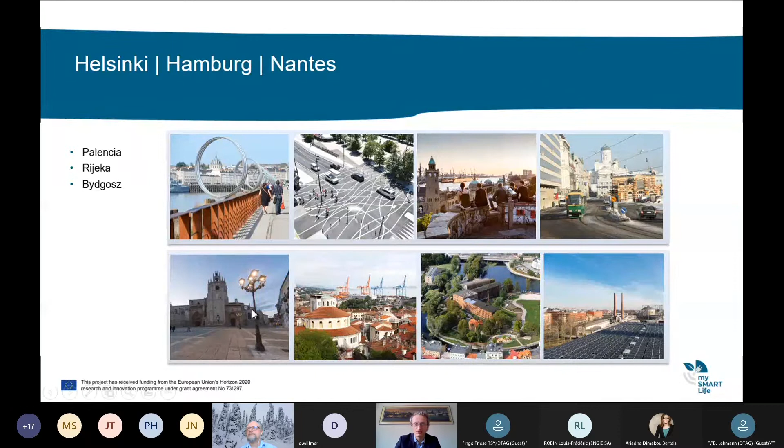We will collect them and ask them aloud to our speakers at the end of this web seminar. Having introduced you to the project and its objectives, the next presentation will be given by Hannu Pikarainen, who will present the heat demand response service. Hannu, the floor is yours. Thank you, Matthieu.

All right, let's start with a brief background on HELEN. HELEN is about a 1,000 people company, and we make net sales of around 900 million euros annually. For this topic, the 1,300 kilometer district heating network is the basic resource.

In addition to district heating, we also offer district cooling, electricity and services for various types of micro generation of energy, like solar panels and so on. We are also involved in electric traffic, like EV cars and so on. Our target is to be carbon neutral by 2035. Next slide, please.

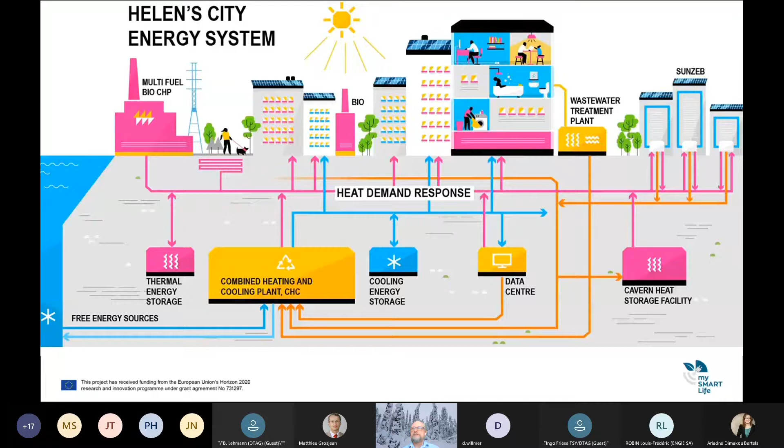So what do we mean by heat demand response in this case? For instance, in apartment buildings, when people take a shower in the morning, there is a certain peak in heat demand. If we could move that peak and flatten the consumption of heat in the network, we could end up with lower energy costs because we can optimize the use of fuels. This also means we could end up with lower emissions. That's the basic idea with heat demand response in this case.

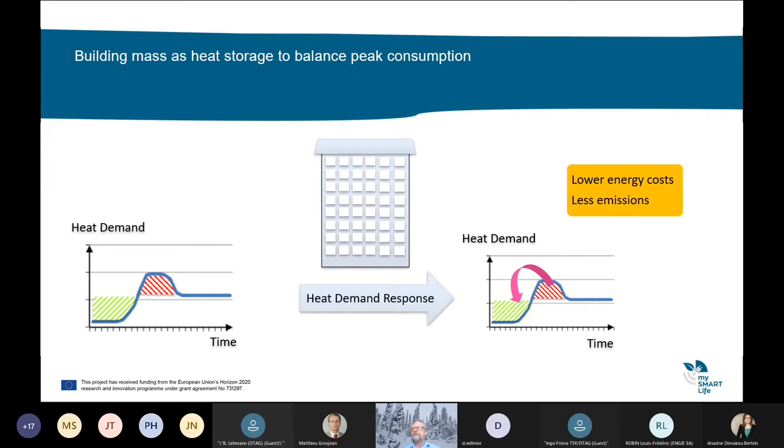And what did we do in this project? We did studies and pilots. We calculated business scenarios for heat demand response, and then we did a residential building pilot and an office building pilot, where we had SALUSFIN and FOURDEG as our partners.

First of all, about the business scenarios. The idea was to find out what kind of capacity there is and what kind of capacity we need to optimize the heat production and consumption with these buildings, and then also to find out the costs, implementation issues and profitability.

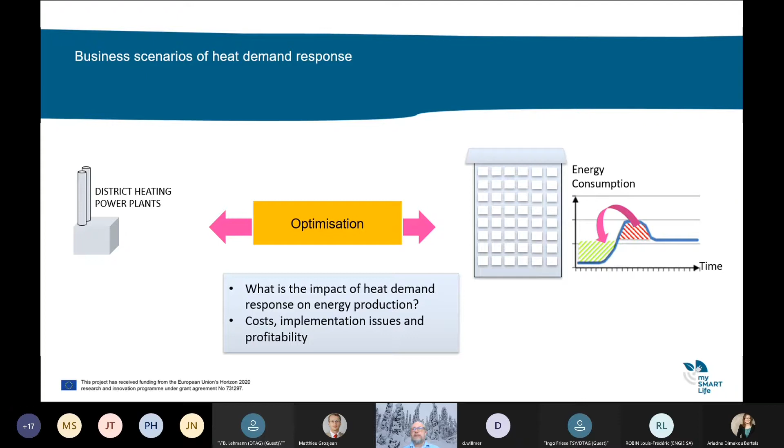So I'm presenting here the business as usual scenario as one of the scenarios, and there we included 550 residential apartment buildings and 50 office buildings or that type of premises into the calculations, and that amount of buildings is around 10% of high-rise buildings in Helsinki.

And from that amount of buildings, if the power can be used optimally, we can get about 100 megawatts of power. The calculation shows about a 10-year payback time, so the solution would end up in savings in energy procurement and also in the production of heat. Currently we have a piloting capability, but there is no commercial use.

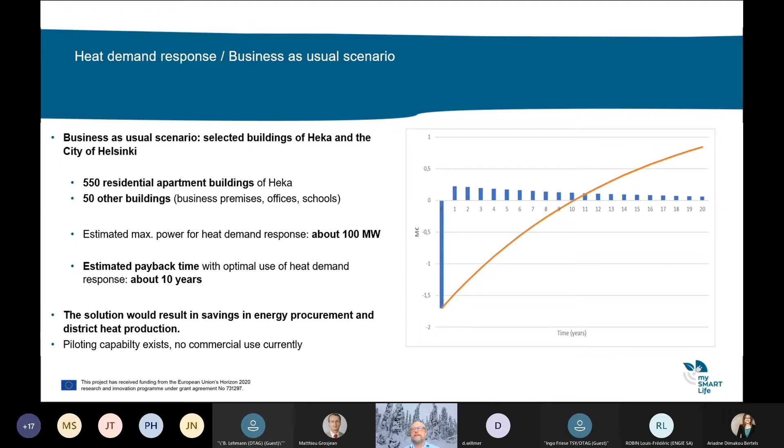In the residential and office building pilots, we developed an interface to our production planning and optimization system, and from that interface the smart heating management system providers can get the heating load and unload requests for buildings. So basically they are based on the demand of optimizing the production planning and usage of demand in Helsinki. The peaks would then be managed in the buildings.

In the apartment buildings there were smart thermostats, and also in the office building smart thermostats that were controlled. The key item here, in addition to finding out the benefits and challenges, was to find out whether people really notice if heat demand response is in use.

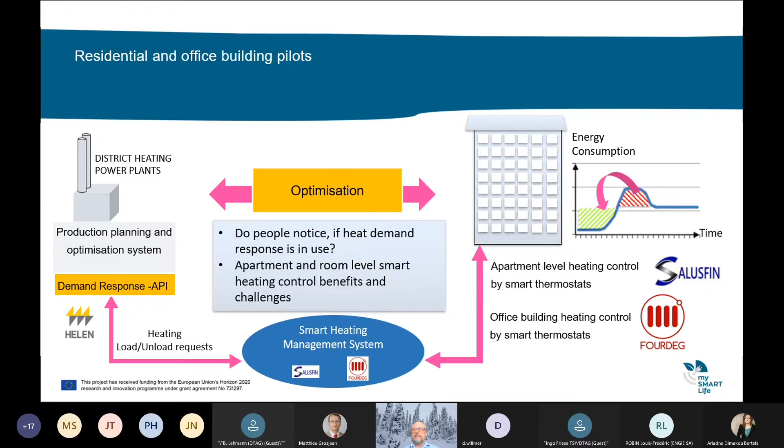The temperature control of these thermostats was changed plus or minus 1 degree from the normal setting value, in this way loading and unloading the building in energy. For instance, the first step upwards here is storing heat into the building.

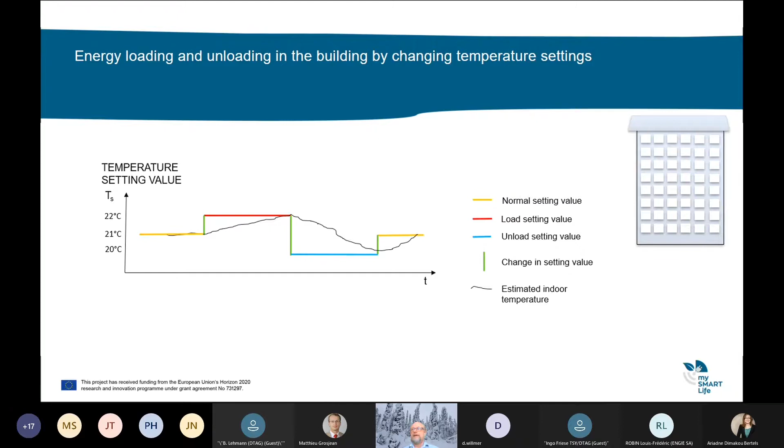The residential building pilot was built in a building with 167 apartments, and although there are benefits with this kind of technology - how you can schedule and control the temperature in the building in a new and clever way, and then get feedback on your energy consumption - there are some challenges we faced.

We used the apartments' own Wi-Fi networks in this pilot, and that proved to be challenging. So it's better to have a more central Wi-Fi network in the house when you want to implement this kind of thing. Customer engagement was also a challenge we faced in this case. So what we can say is that a more central kind of control management for apartment buildings would be more beneficial than the smart thermostats, although they have several other benefits when we think about heat demand response.

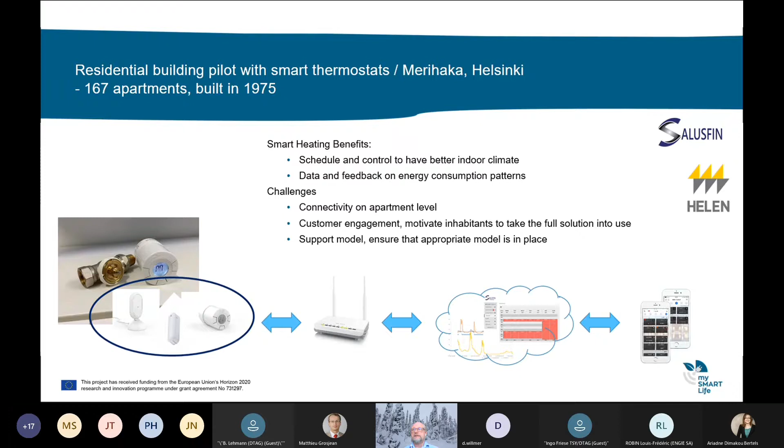Then the office building pilot - in both the residential building pilot and this office building pilot, the tenants' or office personnel's heating quality perception was measured, and in both pilots the people didn't notice any change in their comfort level, whether the heat demand response was in use or not. The office building seems to be more suitable for heat demand response with room-level control using smart thermostats, and of course in the office building they have a more known usage schedule, which makes them more suitable for heat demand response usage.

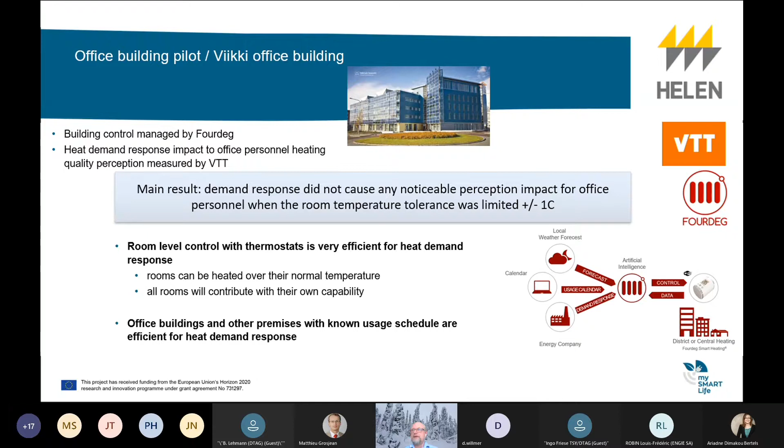If I want to pick one result from this study, it was that we wanted to know if people notice a difference in their comfort level when heat demand response is used, and there was no correlation with the heat demand response management controls and how people felt. This was a key result for whether this kind of service can be taken into use.

Thank you. Thank you very much, Hannu. Exciting potential.

Now let's move to another optimized solution, which is public lighting, which could reduce the energy consumption of many different cities. Monsieur Louis-Frédéric Robin, you are most welcome to start with your presentation.

Thank you, Mathieu. Good morning everybody. My name is Louis-Frédéric Robin, I'm the Group Director for ENGIE, a company for cities and public infrastructures, leading the public lighting and safety solutions offers.

ENGIE, as mentioned by Mathieu, is a worldwide energy company. We operate in lots of geographies, and public lighting is one of our key areas of expertise. I would like to take the opportunity of this webinar within the mySMARTLife initiative to give you feedback on a project based in Nantes, in the west of France, about smart lighting.

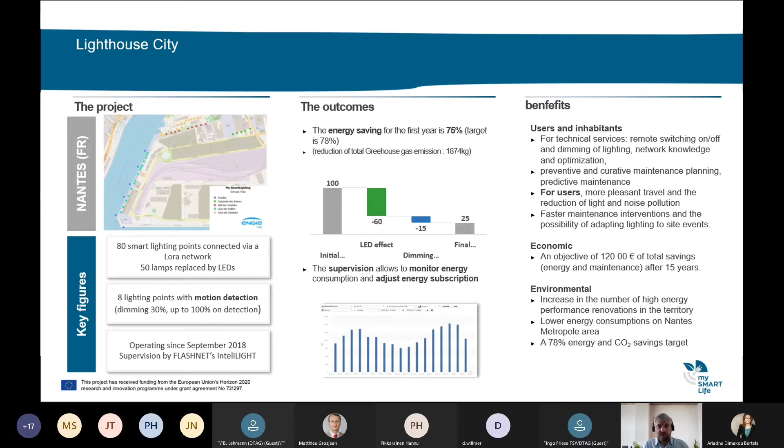So if we imagine making this solution at scale for Nantes - Nantes has 95,000 lighting points, which is quite huge. If we implement these solutions on all lighting points, we can imagine that the city of Nantes will switch from 37 gigawatt-hours to 9 gigawatt-hours. It's very impressive how effective it is, leading their energy cost to shift from 5.5 million euros to roughly 1.4 million. Inflation is not taken into account in this simulation, but we can expect they will divide their electric costs by more than 2. There will also be a minus 30% in maintenance costs for all the lighting points.

Of course, there is another benefit from smart lighting. It allows you to make this infrastructure capable of supporting your smart city project. This is really an infrastructure that could play the backbone role for smart cities in the coming years. Lighting infrastructure surrounds all the pavement, all your streets, so the adherence with the territory is very, very high, and connectivity and power will also be available for all the IoT you want to deploy in your city. So really, you will have another effect - you make savings, and at the same time you set up your infrastructure to jump into the future of the smart city.

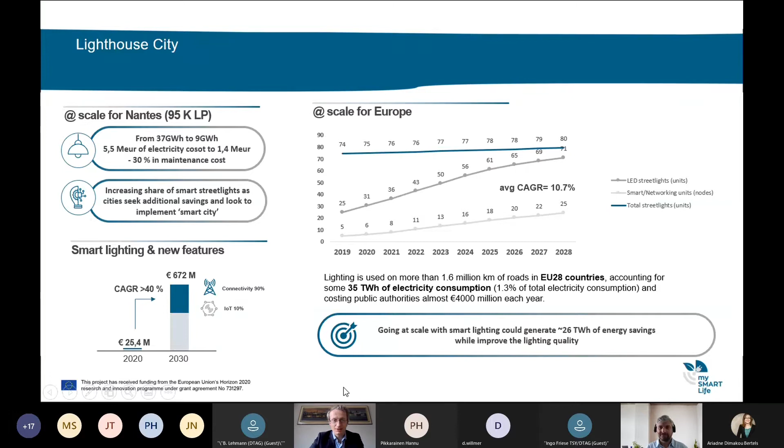Thank you for this clear invitation to all municipalities, local authorities and regional authorities, to look at this solution: public lighting, smart public lighting, in order to become smarter, or for companies to work on how to bring their city to become smarter.

Thank you very much. Now it is time to come back to the citizen and show how to engage them in the energy transition, taking the example of the electric power tenant supply implemented in the city of Hamburg. Doris, it is your turn to spread the word.

Okay, I hope I can. Oh no, I wanted to try to share my screen. You are sharing at the moment, so no problem. I'm sharing, do you see it? Yes, we do, okay.

I want to tell you something about electricity tenant power concepts, and how the citizen can share in the RES production.

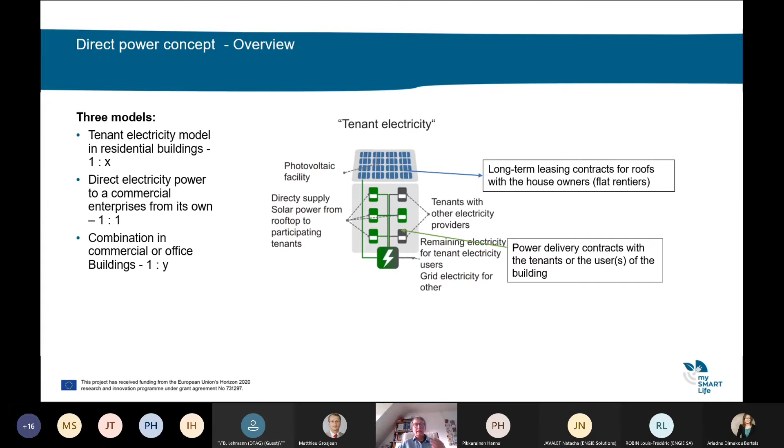Then we have some projects with a combination. There are office buildings where many offices are, and some tenants of the offices, some users - it's nearly like the first part with tenants in the residential building. We put the PV plant on the roof, make the direct supply contracts with the consumers, and the roof using contract with the owner of the building. Next slide, please.

Yes, the start, the roof. There are some pictures, and in Hamburg we have the advantage that there's a solar atlas, and it shows in green color the suitable roofs. So you can click on it and see an overview over Hamburg and see which roof could be suitable, then go in contact with the owners of the building. On the right pictures, you see above the roof of Kampweg, there is a PV plant of Energienetz Hamburg installed in mySMARTLife.

Other roofs we were looking for were too old - the roof has to stay 20 years with the PV plant, so it's not good to take an old roof, it's not suitable. Another roof of a residential building has disruptive constructions and shadings on it and chimneys and so on, so you can't use it - you can't install a good PV plant on it. Next, please.

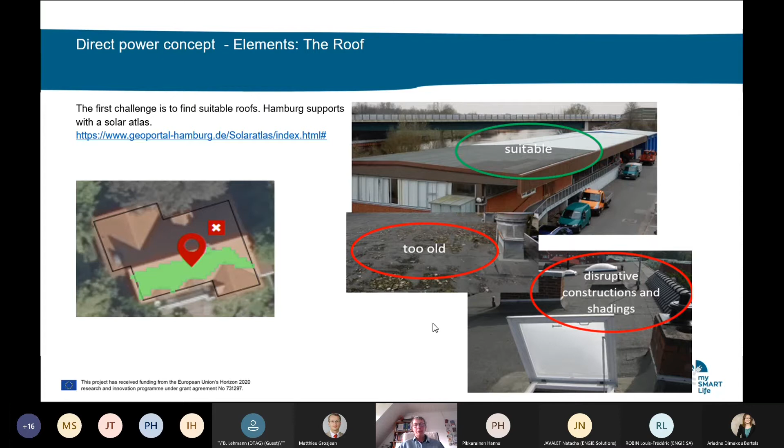So I made a stakeholder analysis, and these are the main players with PV plants and tenant power direct supply. The house owners are the most difficult partners because they have the smallest advantage. If they are not using rooms in these houses, you can't pay a big rent for the roof, so they have no advantage and no compensation for the roof.

The contract is very long, and it comes with a restriction of the roof conversions. The house owners can also be in a hybrid situation. They can be a roof giver and also electricity customer with the direct concept, like at the bakery. Then it's another situation, because they get green electricity from their own roof for a very good price.

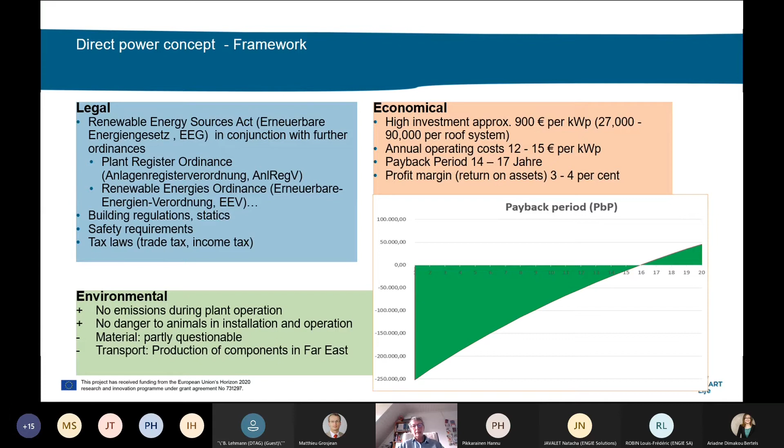So we can go to the next slide. The next slide covers only the steps, and I can tell you we have to define the standard, and then we can start and plan and acquire the roofs. I can give you this if you are very interested; it's in the exploitation roadmap.

Yes, these are our steps to make this business. And then I'm at the end. Don't hesitate to get in contact with me.